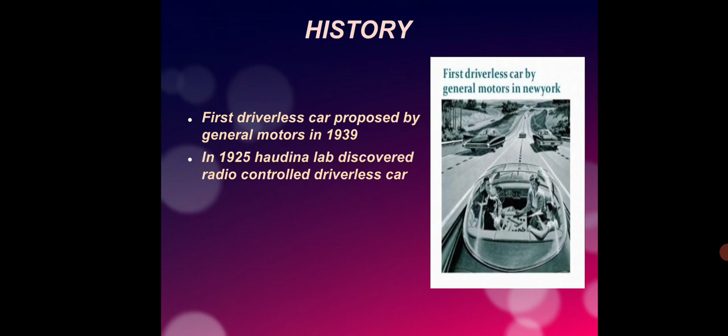The next topic is history. First driverless car proposed by General Motors in 1939. In 1925, Houdina Lab discovered radio-controlled driverless car. In this figure, we can see that it is the first autonomous car by General Motors in New York.

Next, the question is, what is driverless car? It is a vehicle that can drive itself from one point to another point without driver. In other words, car with an autopilot system. A self-driving car is capable of sensing its environment and navigating without human inputs. It can steer itself, it can accelerate itself, can go and stop itself.

And the next question is the reason. What is the reason behind making this autonomous car? Driver error is the most common cause of road accident. Nearly 1.25 million people die in road accident each year. That is, one person is killed every 25 seconds. Using cell phone during driving, drink and drive, entertainment systems are the reason for the road accident. To solve all these problems, driverless car is useful for us, and this is a reason behind making it.

And what are the things we use to make autonomous car? First one is anti-lock brakes or ABS, anti-lock brake system. The first step to a driverless car came in the 1980s with the invention of anti-lock brake system or ABS. When a car is braking hard and doesn't have anti-lock brakes, the wheels can lock up, sending the car into an out-of-control skid or rollover.

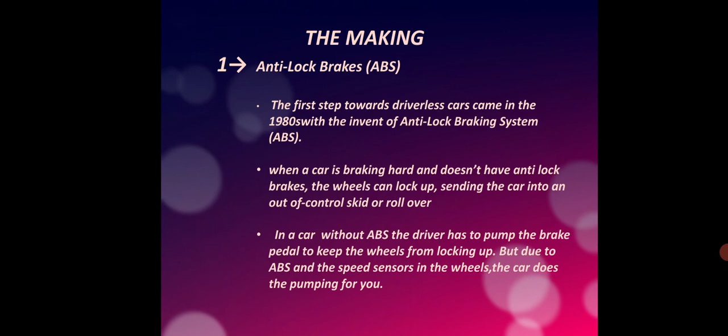In a car without ABS, the driver has to pump the brake pedal to keep the wheels from locking up. But due to ABS and the speed sensors in the wheels, the car does the pumping for you.

Second one is traction and stability control. These systems are a step up the sophistication ladder from ABS. They use the sensors at the wheels to detect when a car might go into an out-of-control skid or rollover. These systems can increase or decrease power to individual wheels, which is often better than brakes or power being applied on all four wheels.

Third one is emergency brake system. EBA is a generic term of automobile braking technology that increases braking pressure in an emergency situation. By interpreting the speed and force with which the brake pedal is pushed, the system detects if the driver is trying to execute an emergency stop, and if the brake pedal is not fully applied, the system overrides and fully applies the brake until the ABS takes over to stop the wheel locking up.

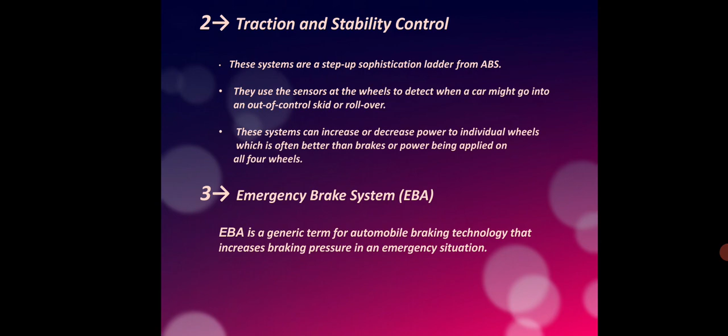Fourth one is detecting traffic lights. Actinometer is a sensor used to detect the intensity of radiation. If detected intensity is of red or yellow color, then the controller will send a command to immediately stop the vehicle. The command will act as an input to the mechanical system, thereby stopping the vehicle.

Next, automated night vision. An automotive night vision system is a system to increase a vehicle driver's perception and seeing distance in darkness or poor weather beyond the reach of the vehicle's headlights. Active systems use an infrared light source built into the car to illuminate the road ahead with light that is invisible to humans. Passive systems do not use an infrared light source. Instead, they capture thermal radiation already emitted by the objects using a thermographic camera.

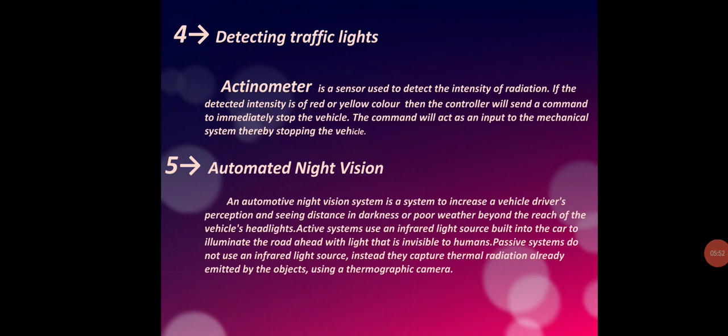Next one is intelligent cruise control. Cruise control is used for maintaining a constant speed set by the driver and thus can be of great comfort in steady traffic conditions like highways. This can be achieved by the use of sensors or a radar setup that detect the approaching vehicle, and thereby reduce the speed and accelerate again to the preset value when the traffic allows.

Seventh one is lane support system. In order to reduce collisions due to driving errors, distraction, talking on cell phone, etc., lane support system was developed. It is a mechanism designed in such a way that the driver gets a warning when the vehicle begins to move out of its lane.

Eighth one is self-parking. Self-parking system includes sensors all around the car to guide it to the allotted parking space. The driver has to first find a position for parking and then use the in-cabin navigation to tell the car where to go.

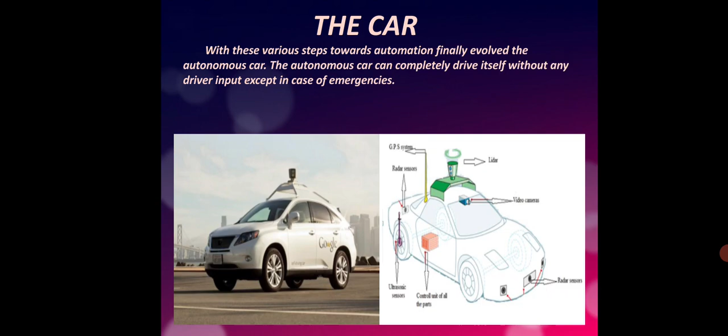With these various steps towards automation, finally evolved the autonomous car. The autonomous car can completely drive itself without any driver input except in the case of emergencies. In this figure, we can see that the autonomous car has different parts to sense its environment. On the top of the car, we can see the lidar and video camera, and in the front part there is a radar sensor, and control unit of all the parts, ultrasonic sensors, GPS system, etc.

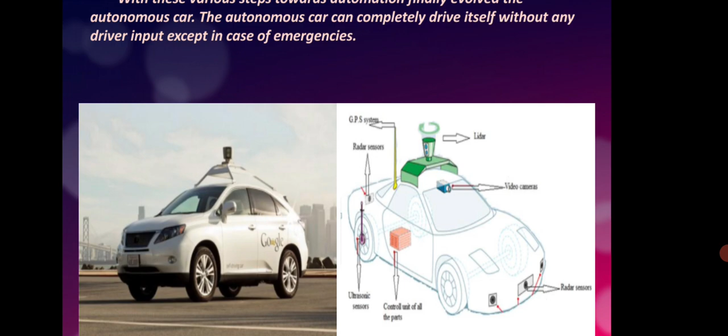The heart of the system is a laser rangefinder mounted on the roof of the car. The device generates a 3D map of the environment. The car then combines the laser measurement with the high resolution maps, producing different types of data models that allow the car to drive itself while avoiding obstacles and respecting traffic laws.

In addition to the laser, the car also has various other sensors including 4 radars mounted on the front and rear bumpers to view the front and rear traffic. A camera positioned near the rear view mirror to detect traffic lights. A GPS system, wheel encoder that determines the wheel's location and keeps track of the movement.

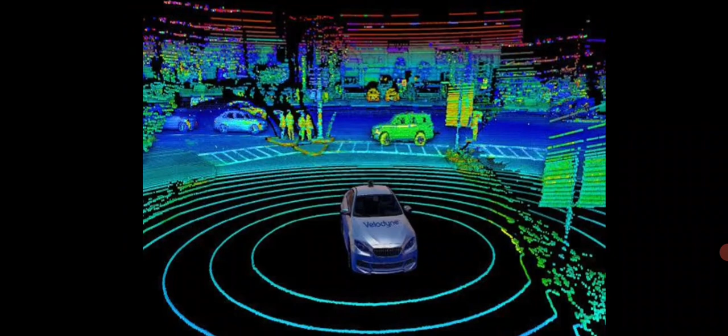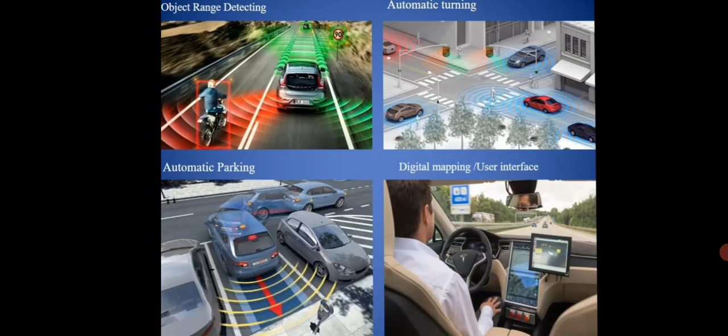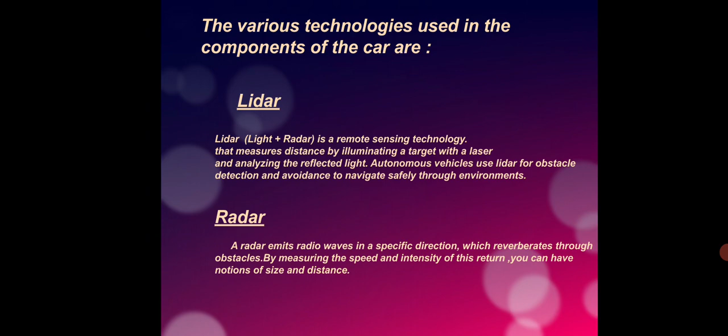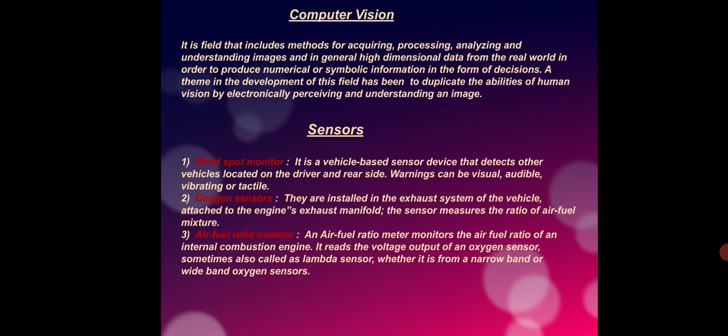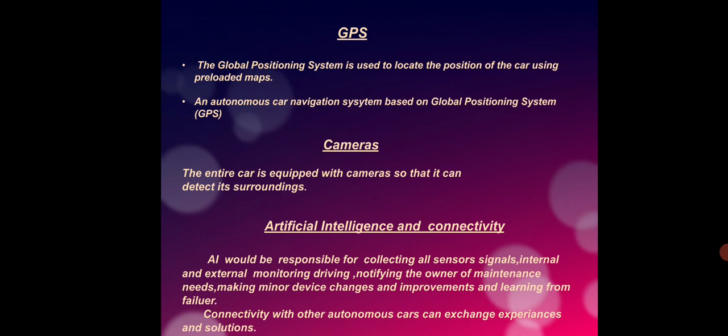Next one is cameras. The entire car is equipped with cameras so that it can detect its surroundings. The last one is artificial intelligence and connectivity. AI would be responsible for collecting all sensor signals, internal and external monitoring, driving, notifying the owner of maintenance needs, making minor device changes, and improving and learning from failure. Connectivity with other autonomous cars can exchange experience and solutions. Technical insight: this picture represents the technical insight of an autonomous car.